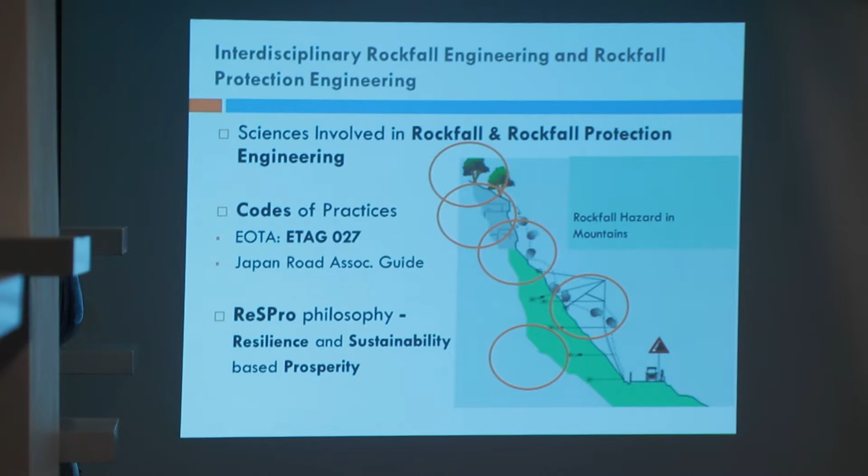And indeed, I again want to highlight that our infrastructure development should be sustainable as well as resilient, so we have to think about the environment as well. If we think about environmental science and environmental engineering in rockfall protection, there comes the role of environmental engineers as well. So what I'm trying to highlight here as the fundamental concept is that rockfall engineering is an interdisciplinary field, and rockfall protection engineering is such a beautiful field of specialization which requires interdisciplinarity.

Now let me penetrate a little bit into the evolution of the Siddhababa DPR. Actually, in 2012, when I was pursuing my PhD, BBC Nepali came to Ehime University and they took our interviews. That was the point when I introduced the possibility of doing rockfall protection in Nepal and at the Siddhababa site.

An engineer who was a friend of mine from Pulchowk Campus happened to design an investigation project, and I was the team leader while back in Japan. I engaged my colleagues in Nepal, and it was done distantly. We prepared a report in 2012, and we tried to find what were the reasons of rockfall, and what could be the possible intervention and protection measures.

And back in 2016, under the leadership of Uttam Pradhan, we happened to design a DPR for rockfall protection along around a 2 kilometer stretch of the Siddhababa Road.

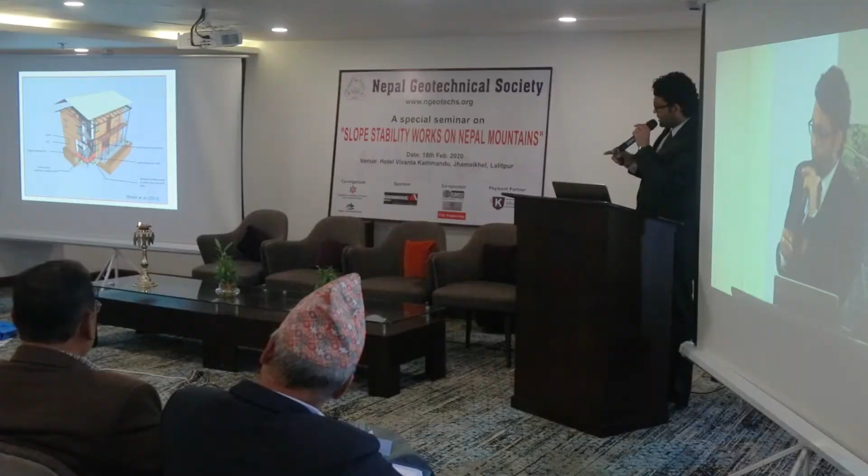This was proposed in 2016 when I came to Nepal from Australia to support post-earthquake reconstruction. As part of my National Reconstruction Movement campaign, I tried to serve as an engineer in different rural districts: Kabre-Palanchok, Sindhupalchok, Gorkha, Sindhuli, many different places. This was our proposal, integrated with interlocking brick, and I was the team leader for getting it approved from the government of Nepal. You can see in Reconstruction Design Catalog Volume 2, my name acknowledged as the team leader.

Interlocking brick was approved, but rubber soil mix is still not too convincing. Now I have moved to Nepal permanently and am trying to carry on that campaign. Based on my conversation with CLPIU friends in the government of Nepal, they are very positive to approve rubber soil mix. Someday we might be seeing a revolution of rubber soil mix, RSM, use in roads, buildings, and other heritage site projects.

This is a self-funded project. I love conducting research and supervising research. In 2013, I supervised one of my researchers using my own fund, and we published journal articles and conference papers as well, and he has just recently finished his PhD and is doing so well. Similarly, now I have another researcher, a graduate of Pulchowk campus, and I have been funding myself, and he has been doing this research, and we have just completed the write-up and sent it for publication.

I hope I don't have to do more when it comes to road. There are so many leaders of road departments and other road-related departments. So I really appeal to you, sir and madam, to facilitate funding for rubber soil mix use in road projects so that we can have our own native solution. So what is that native solution?

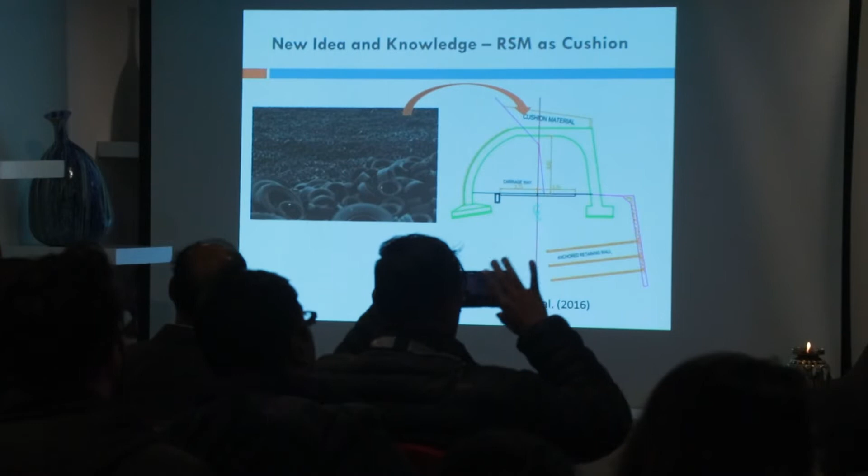See the consequence of using RSM in buildings. Now I have been proposing the use of this rubber soil mix, or scrap tire, in rock sheds as well. What you do here is model it using a 2 degrees of freedom system. My mentor at the University of Melbourne has developed a program to simulate that behavior of the 2 degrees of freedom system. Using that, by characterizing the cushion made of rubber soil, we can actually know how much energy is dissipated on that cushion layer.

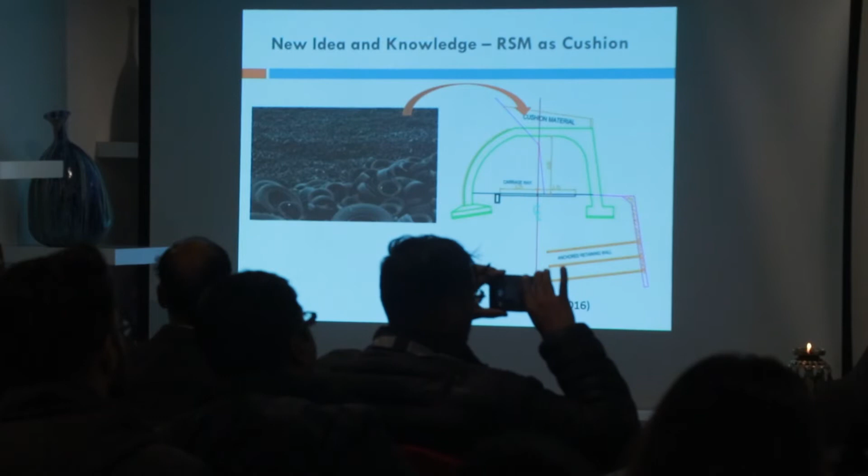Once you know the energy dissipated on that cushion layer, for the remaining energy, you can actually design your concrete rock shed and reduce its size. That means you would have more carriageway width. You can save the cost with the same size. Such a beautiful solution that I really wanted to propose. If you fund this research project, otherwise I'll fund it from my pocket anyway, doesn't matter. We should be able to design rock sheds with rubber soil mix as the cushion layer.

But look, this is how life goes, we have to struggle. Anyway, let's work with NGS to use rubber soil mix in rock sheds and use the hands-on skill of geowork-like companies along with our own native innovation, and go ahead with it. This is what I really wanted to appeal, and thank you for kindly listening to me. Thank you very much.

Siddha Baba site along Siddhartha Highway has seen more than 70 deaths in a 3-kilometer stretch over the past years.

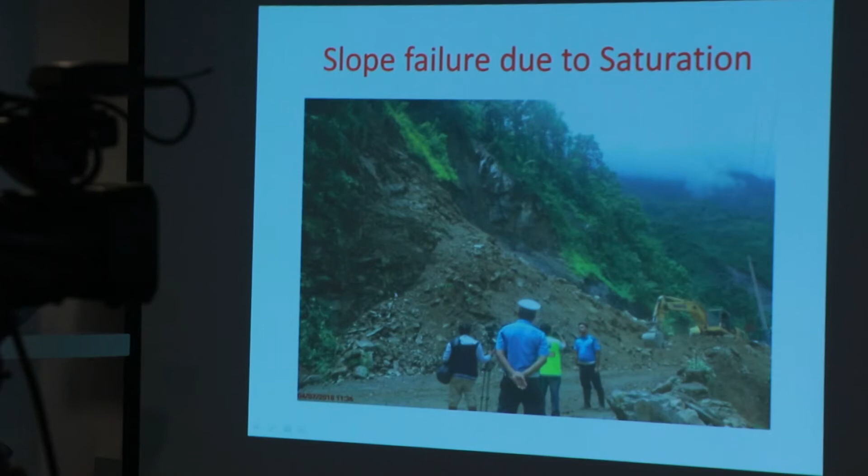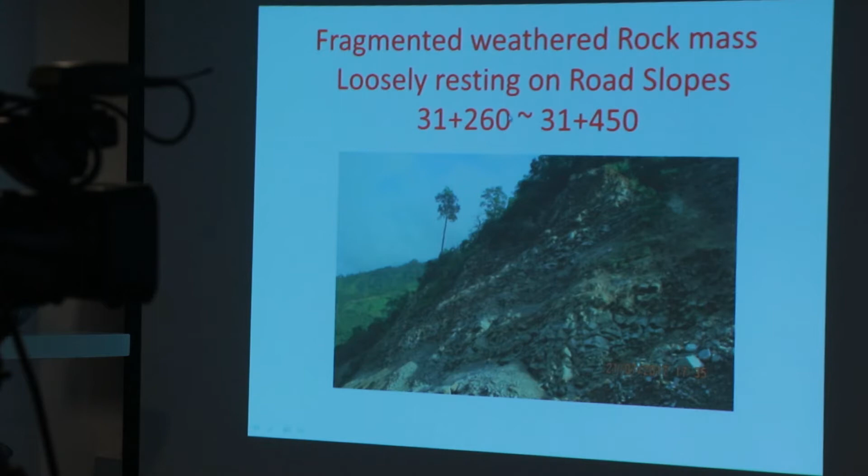Here is a photograph of slope failure on the Narayanghat Mugling Road itself. This is one of the problematic sections, currently controlled by slope trimming and rock netting technique. This is another problem site where the rock mass is sliding from its joints.

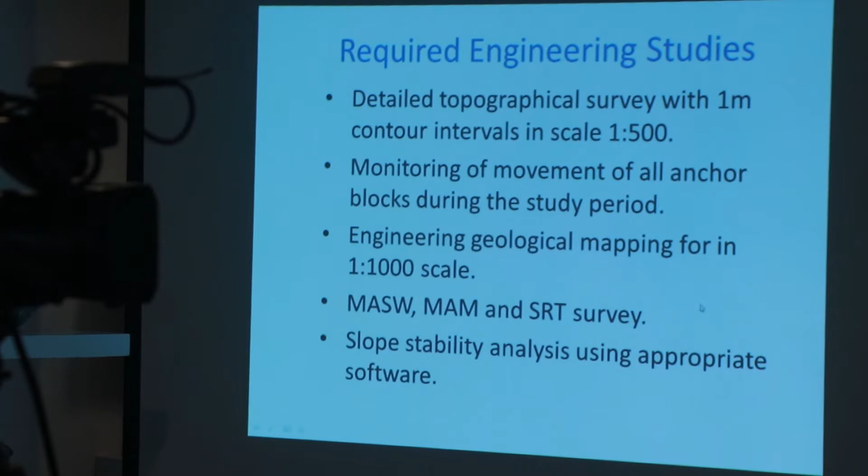For slope stabilization works on such roads, we found the following engineering studies are required: detailed topographical survey with 1 meter contour intervals at a scale of 1:500, monitoring of movement of all anchor blocks during the study period, engineering geological mapping at 1:1000 scale, MASW, MAM and SRT survey works, and slope stability analysis using appropriate software.

The solution and studies include rock bolts, rock nets, toe wall, drainage, soil nailing and bioengineering measures. Usual survey works such as topographic survey, drone survey, and engineering geological mapping will be required at such sites.

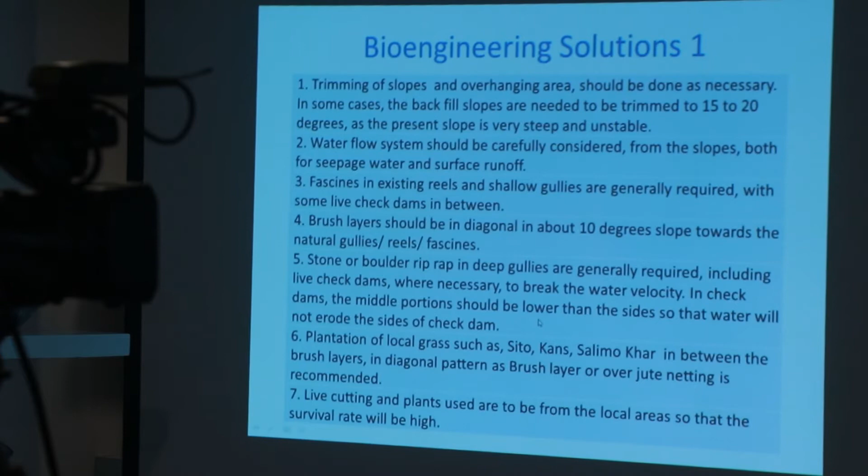So here I am presenting the bioengineering solutions. Many bioengineering techniques are covered here, from 1 to 7. The first is trimming of slopes and overhanging areas as necessary. In some cases, the backfill slopes need to be trimmed at 15 to 20 degrees, since at present the slope is steep and unstable.

Second, the water flow system should be carefully considered from the slopes, both for seepage water and surface runoff. Third, fascines in existing rills and shallow gullies is necessary, with some live check dams in between. Fourth, brush layers should be diagonal at about 10 degrees slope towards the natural gullies, rills and fascines. Fifth, stone or boulder riprap in deep gullies is generally required, including live check dams where necessary to break the water velocity.

In check dams, the middle portion should be lower than the sides so water will not erode the sides of the check dam. Sixth, plantation of local grasses such as sito, kans, salimo, khar, simali khar in between the brush layers in a diagonal pattern as brush layers or over jute netting is recommended. Seventh, live cutting plants used should be from local areas so the survival rate will be high.

Bioengineering solutions: the eighth is jute netting may be required with use of live cutting pegs in steep areas with loose soil materials. Grass seed spreading is recommended in areas over jute netting or open rocky areas.

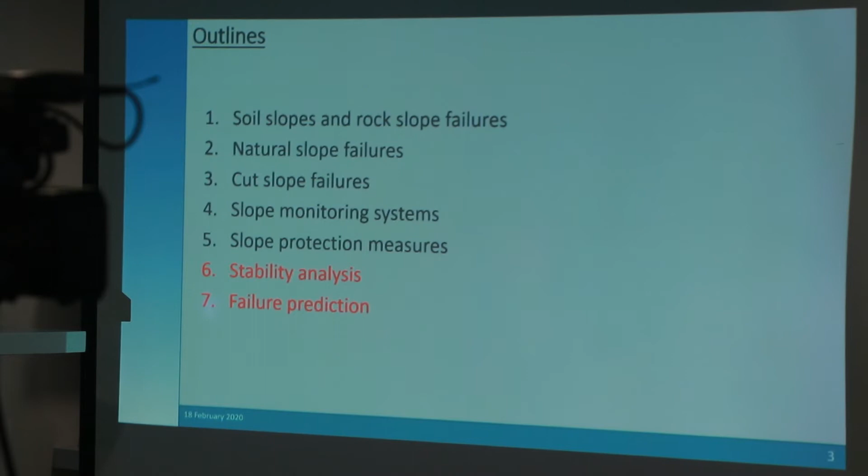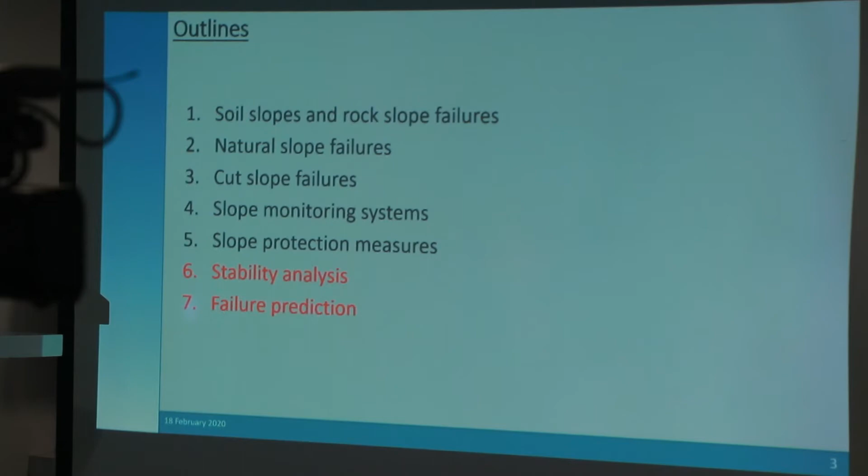For the outline, I try to cover some typical soil slope and rock slope failures in different parts of the world, natural slope and cut slope - same thing - and a slope monitoring system, not typical modern but contemporary after 2000. Some slope protection measures in general, and I tried to cover a little on stability analysis and failure prediction. These are, I think, the new things. Our MSc students might work on this.

Natural rock slope hazards, as my previous presenter already presented, are encountered in roads, reservoirs for dams, and river valleys. Similarly, cut slope or built-up slope hazards we encounter in open pit mine slopes. That doesn't exist in Nepal yet, but maybe in the recent future, after 10 or 15 years, it will come.

Another one is slope failure during deep dam foundation excavations. We are designing several mega-size hydropower projects with 100 to 200 meter high dams, and sometimes the depth of bedrock is 100 meters below the riverbed. In that condition, we have to excavate all the way down to 100 meters, so we'll have rock slope stability problems there.

The next one is for surface powerhouse excavation - we already faced it in several projects, and more are coming. Next, we don't have an issue with embankment dams because we only have one in Nepal, Kulekhani, which is a 112 meter high rockfill dam, and it has not failed. So we haven't faced that, but it may come in the future.

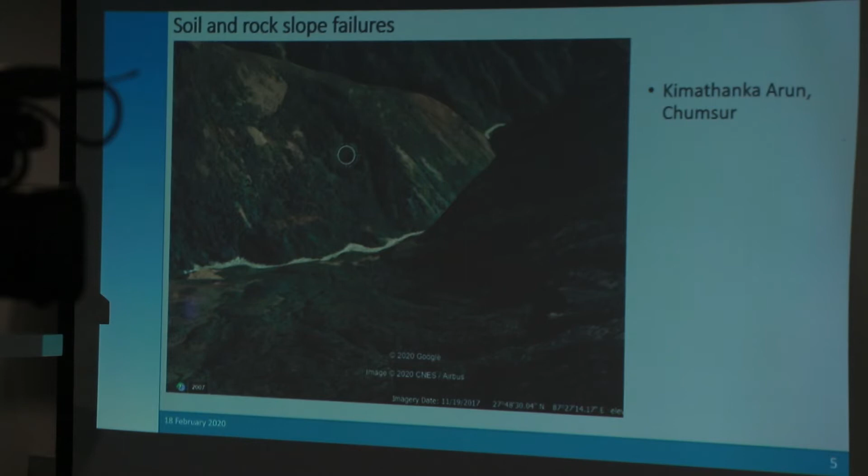The failure started at 3200 meter elevation, and it happened in June, that means before the rainfall. So I think it started with the melting of the snow, because the snow line at that place is around 2700 meters, so it started up to 500 meters above that.

When the snow started to melt, it disintegrated some part of the rock, and it started at the top, and when it moved down, it brought all the material on top of the rock.

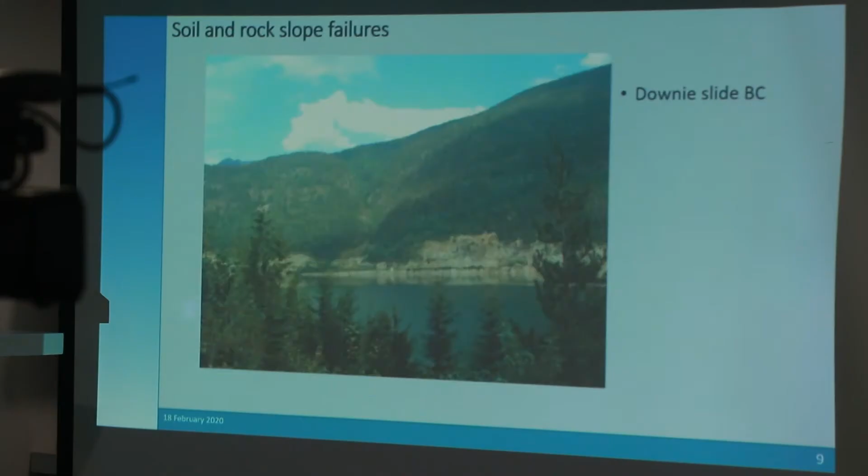And we are building some of these dams, so I think these examples are suitable for us.

Another one - these are natural slopes, and this one I don't have the picture for because this picture was taken in 1978. It's also for the same dam, Revelstoke Dam. When they were excavating a 14 meter diameter diversion tunnel, there was a failure just upstream of the diversion tunnel. You can see the heave of around 14 million cubic meters of rock, all at once, and there were very few fatalities.

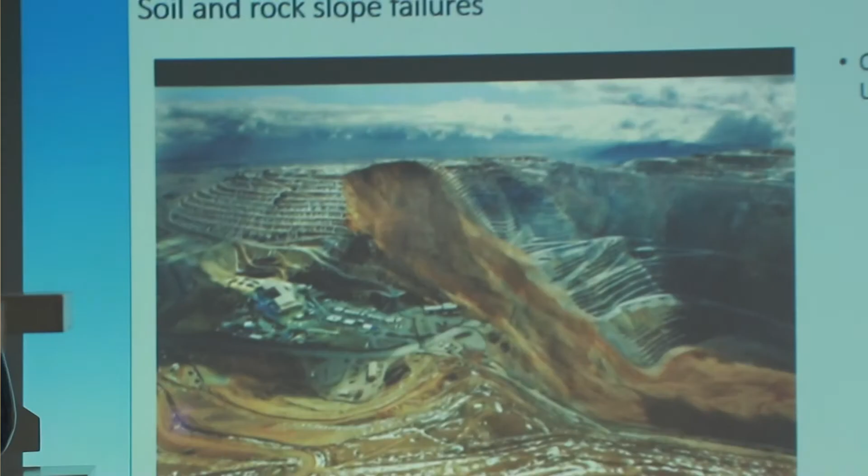The operation of open pit mines is really complex because people are working there. You have to protect the people, you have to evacuate them, and you also have to know when the slope is moving, so when it will fail. That has to be monitored. This one is one of the mines in the US, and the other one is the copper mine in South Africa. We don't have that big a mine yet, but hopefully if we get some more metals, then we can have mines.

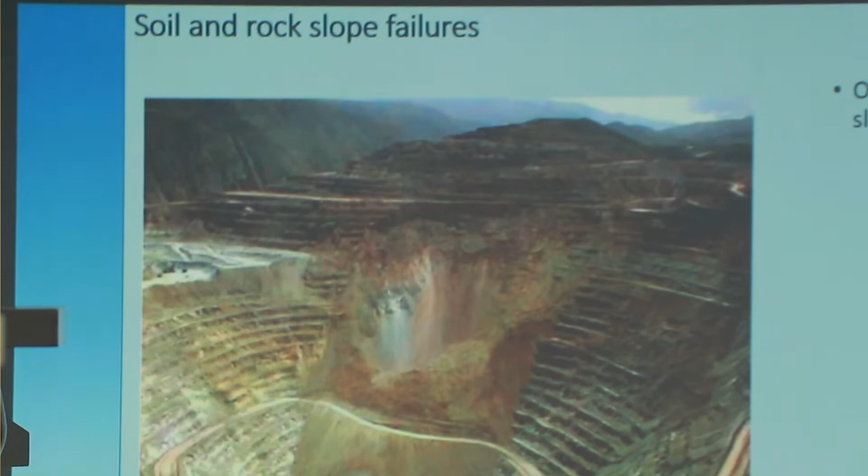Sorry, I think it's 2002. This one is 2002, I don't know the date of the previous one. Yes, in 2002, sorry.

So I jumped to slope monitoring. As already said, I just collected things together.

The instrumentation we use in monitoring slopes includes inclinometers to measure deflection, and one new thing, shape accelerometers, which I used. It's a three-dimensional array, coming in a 30 centimeter long sensor, and it can measure three-dimensional deformations in X, Y, Z. But it's complex. If the slope is moving really slowly, it's very difficult to determine which direction it's going. But if it's moving in a single direction, it's very particular, and it's real-time monitoring.

That means you'll get the data in real time. Like with the inclinometer, you go and put the instrument, and if you measure today and then tomorrow, you'll get two data points. But with the shape accelerometer, you can get data every 10 minutes, every 5 minutes. You can customize the data.

Next one is piezometers, which I think we are all familiar with. I have a detailed photograph as well.

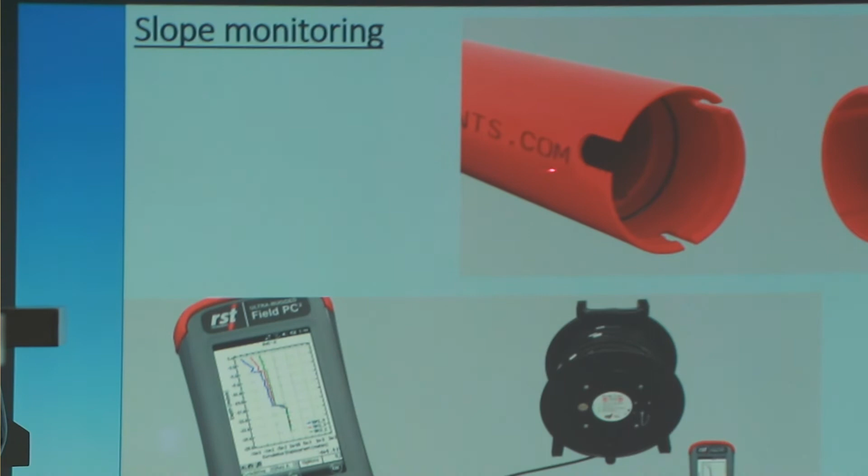Here is the shell of the inclinometer. We put it in from the ground. We insert these measuring instruments, and then we get the position of the inclinometer at that particular time.

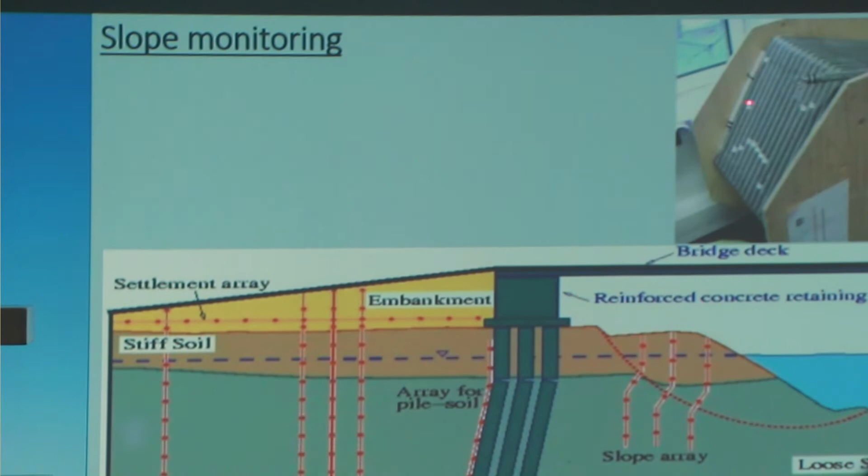For the shape accelerometer arrays, these are the arrays. They come in 7 meter, 9 meter, and even longer if we want, but they are pretty expensive for us, about $150 per foot. So pretty expensive, but how can we use it?

It's on a slide. We can put these arrays vertically, and if it's moving in this direction, you'll get real-time data. Also here it's showing the concrete pouring of the bridge, and it can be placed together, just in the tunnel like an extensometer around the tunnel.

It continuously emits laser to the slope, and when it returns back, it records the difference in time. So let's say if the slope moved 5 centimeters, there should be less time for the laser to travel from the source to the slope. That's how it works.

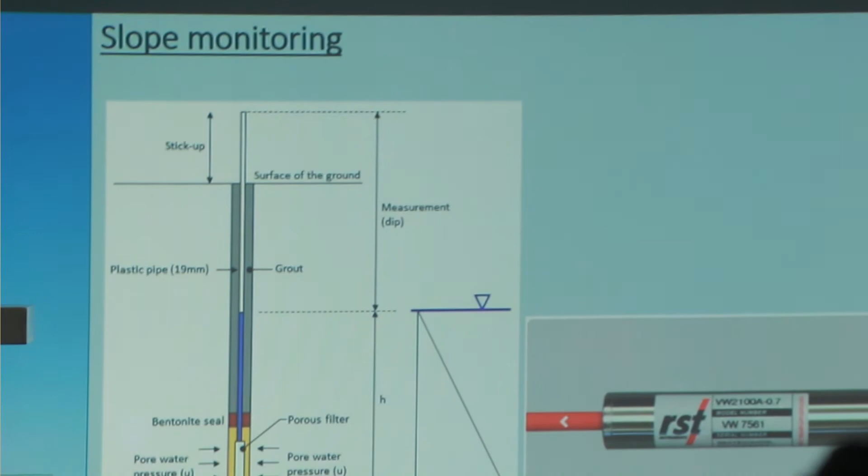The most effective thing in pore pressure measurement is, let's say in a soil slope, when we already know the shear plane. Then what we can notice in the pore pressure is if there is shearing or acceleration in the movement, we can feel the acceleration in the pore pressure generation. That's how we get the information from the piezometers.

Okay, so not in detail, but I just summarized some of the slope protection measures. I haven't gone to the stability analysis yet because that's a really big thing and it takes time.

So what I suppose, the slope protection measures are based on the following factors. The first thing, we can achieve slope stability from the reduction of pore pressure, in most cases, if the slope is not drained and is full of water. The next is the reduction of the slope itself, meaning change in the slope geometry. And the third one is we can protect the slope bottom from erosion, slope surface from erosion.

That's how we do it, I think, in bioengineering. And protection from toe cutting, where we put the toe wall. That's why if there is support at the toe, then it will not move at the top.

And the next one is slope reinforcement. What I mean by this is either bioengineering reinforcement or short bolts that we don't anchor, we just put there, like rock bolting in a tunnel.

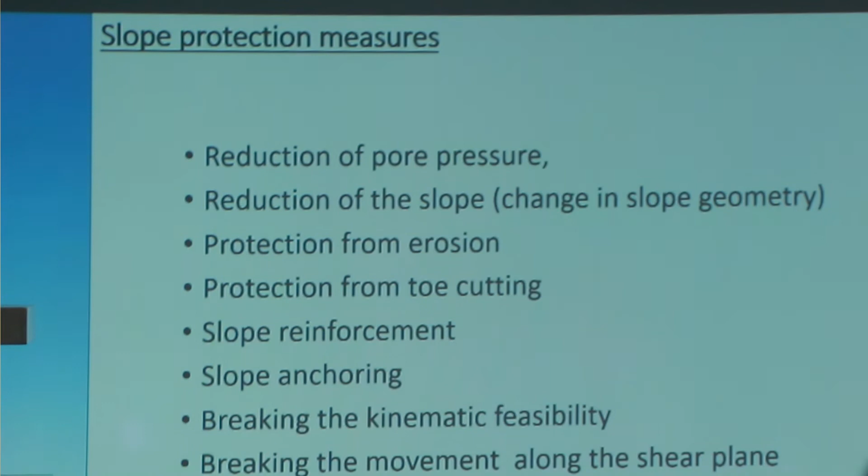And next is slope anchoring. Like if we have a big block, we cannot just put a bolt. In that case, we have to tie that big block to a stable rock surface.

That's slope anchoring. Another one works with slope anchoring, but we break the kinematic feasibility of the whole rock structure, like the joint and foliation plane structure. We add something and then we break the feasibility.

And another is breaking the movement along the shear plane, where we can introduce, let's say, toe support, or even increase the load at the toe. There are different things, so I have some examples.

This is again the example of the Dutchman Ridge, just upstream of the Mica Dam which I described earlier. This one includes almost a 9-kilometer long drainage gallery system at different directions. They measured the pore pressure before and after introduction of the drainage gallery. This pore pressure reduction will certainly increase the friction parameter, I suppose, and that will help reduce the rate of slope movement.

Next, I'll come back to the slope of the upper Sanjen powerhouse. There, we tried to change the geometry by removing the top unconsolidated soil mass. At the beginning we tried with a bottom toe wall, but in the end, when we excavated from top to bottom and used surface reinforcement, it worked, and there was no need for the bottom toe support.

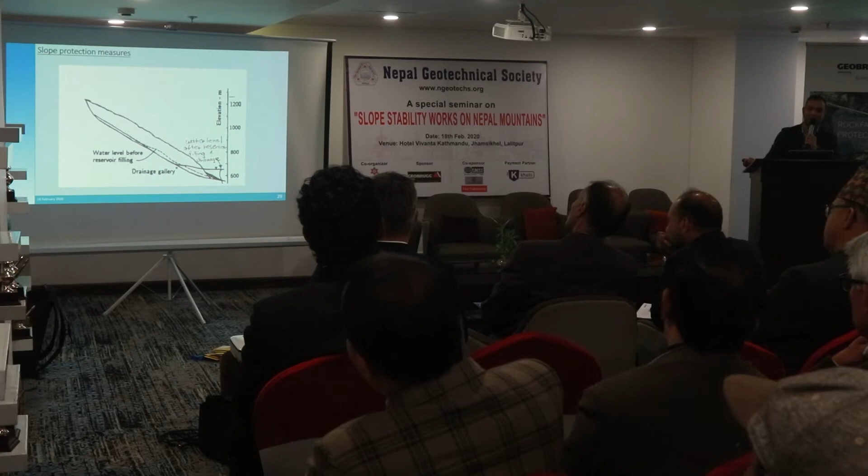So I will come to this one. This has one particular thing - again the slope of the Dutchman Ridge. There was a big question: why is it moving 6 to 7 millimeters per year but didn't fail? Most people's analysis was because of this toe weight.

So if we remove this toe weight and just analyze the slope, we get a factor of safety less than 1. So in road excavation, river valley construction, and dam excavation, this has a big meaning in the consequence. What is the consequence? We don't care - we just cut at the bottom and look at the upper slope.

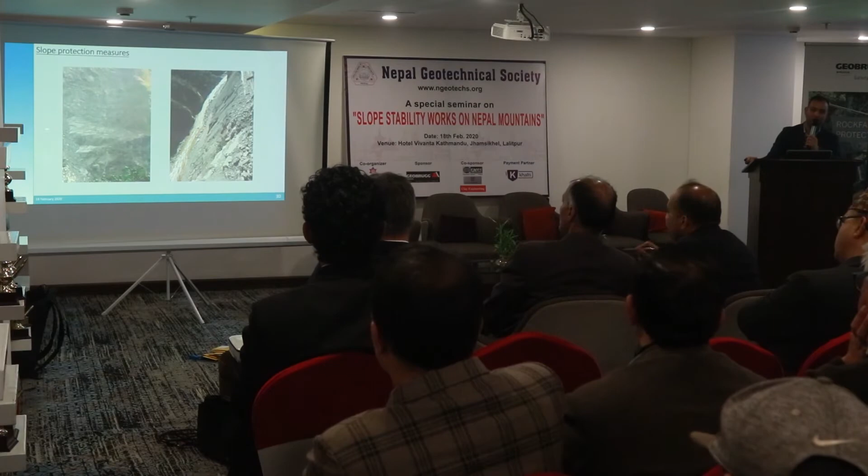And next is the toe at the corner of the upper Arun project, where the Arun River bends. You can see this one - it's not the foliation but one joint, and it provides the kinematic feasibility of the whole upper part of the failure. So the bottom part started not with this, just with tension failure. At the bottom the rock failed in tension, and when it reached this joint, it couldn't support the upper part, and it just moved at one point.

And the next one I will come to. This figure you can guess - the Bagmati River is cutting the toe of the whole slope, and this threatens the upper slope of the recently cut sections. I don't have any details on this one.

Okay, so I'll come very briefly to stability analysis, because I think it's a really big and important topic that I could not cover just now. For the slope stability analysis, what I propose is that in the slope stability methods, the important factors are first the formulation of the failure mechanism.

And what we do next is we use the commercial software - the same commercial software for the soil slope and for the rock slope. For the case I just showed in the road section, it has rock outcrop every 10 meters, and in the middle there is a colluvium. So where is the failure plane? We put uniform homogeneous material all the way down and use the software. So you can judge it - you are our geotechnical engineers.

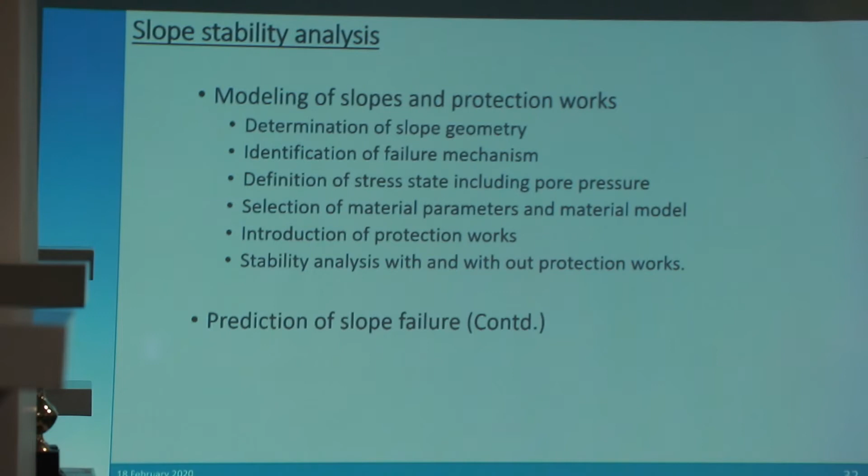And next, as I already said, the prediction of slope failure. There's lots of work done actually in the open pit mine field. Some people - there are lots of papers you'll find on how to predict the failure date. So if you can predict, okay, this slope will fail on March 3rd, then you will get lots of money. Who will try it? Who wants to try it? I think our new engineers. Thank you.

May our fragile slopes be well equipped with inclinometers and piezometers. May no Jure landslide repeat again. And may your work turn out to be a milestone for the coming future.

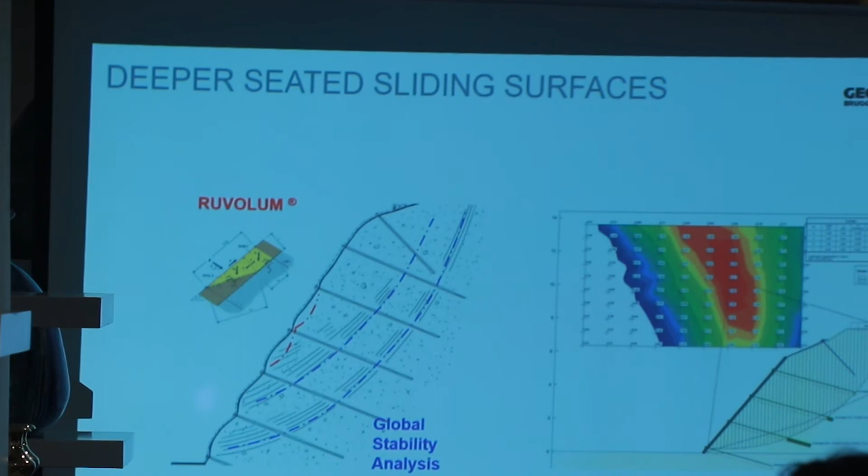So for deeper seated sliding surfaces, first we would do a global stability analysis and then investigate what happens between the nails. And for superficial instabilities, we would go with an analysis of the slope with this RUVOLUM software. This is just a...

Different force transmission. This is an issue I face very often, that there is, even in the geotechnical society, not of Nepal I would say, but in general, globally, there is sometimes a little bit of confusion about what we are talking about.

On the left-hand side here you can see this is an anchor, which is a real anchor. It's a pre-stressed anchor. That means we only mortar the bottom of the anchor, of the rebar, of the strands. And this, of course, then has to lie behind the sliding surface, which you can see here. Also, then we have the free anchor length, and you can see here also that there is a very high load of force at the head of the anchor then.

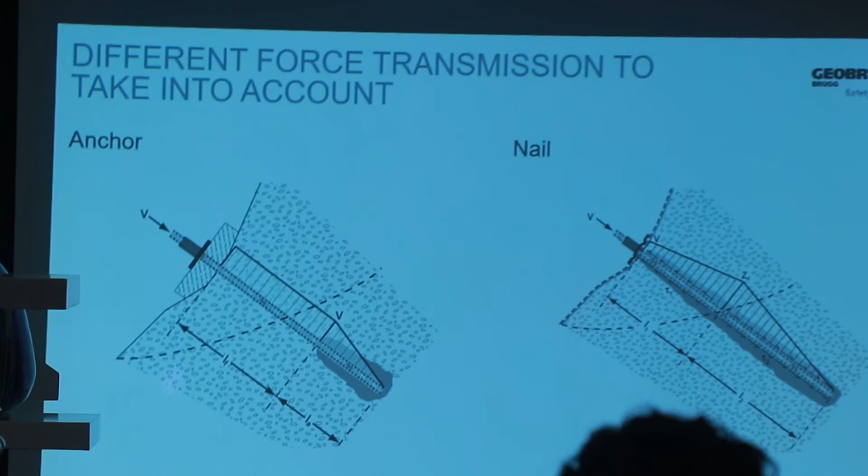That's why, for example, we do those pillows at the head of the nail. Whereas in most applications, when it's about the slope protection systems I'm talking about, we will use nails which are fully grouted and will transmit the force, the load, through skin friction. And here, the load at the head of the nail is smaller than in an anchor case.

So this is something I find very often, a little bit of confusion. Are we talking about anchors? Are we talking about nailing? Then if we talk about the foundation of rockfall barriers, yeah, we anchor them, but in fact they are micropiles. So this is something to keep in mind, I think.

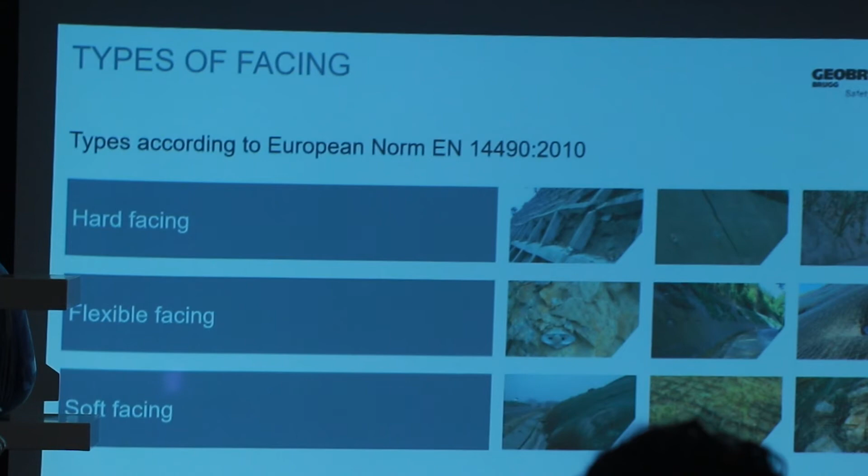So when we talk about the facings, we can diversify into basically three different kinds of facings. We have hard facings, mainly dealing with any kind of concrete structure. We have soft facings, which are generally, for example, geosynthetics. And we have flexible facings, which are all sorts of different kinds of meshes.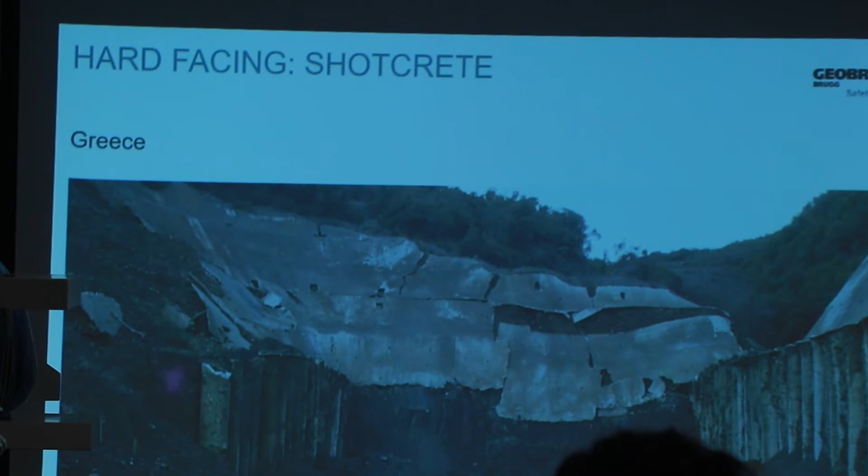So with the hard facings, shotcrete is one of the most widely applied methods all over the world. The problem with shotcrete, from my perspective, is very often that we cannot see or control what the water is doing behind the facing. And even if we put drainage pipes according to the design, have you ever tried to do maintenance on those drainages after 5, 6, or 10 years? Depending on the fine-grained material behind the facing, this is a difficult issue. Here you can see a typical shotcrete failure.

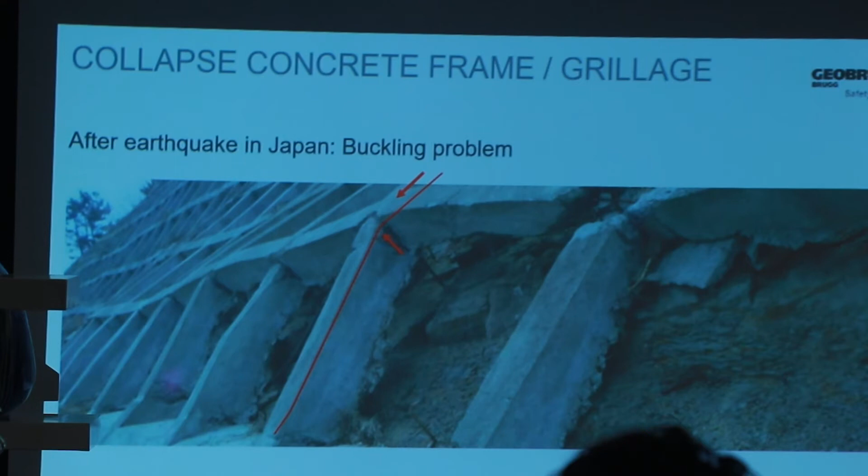Other hard facings, for example, are those concrete grid beam solutions, widely used in Japan. You can find them in Taiwan, or in other countries all over Asia and also South America. The problem I see with them is that they are extremely time consuming. To build all those formworks and then reinforce them properly is extremely time consuming and costly. Another disadvantage is that it's a brittle structure, and especially in earthquake-prone areas, they are very vulnerable.

Soft facings, geosynthetics in general, are very good for erosion control, but for slope stabilization, rather not. Then when we come to flexible facings, there are a couple of older systems, and the pictures you can see here are from a system introduced by Geobrugg in the 80s, which uses mainly wire ropes.

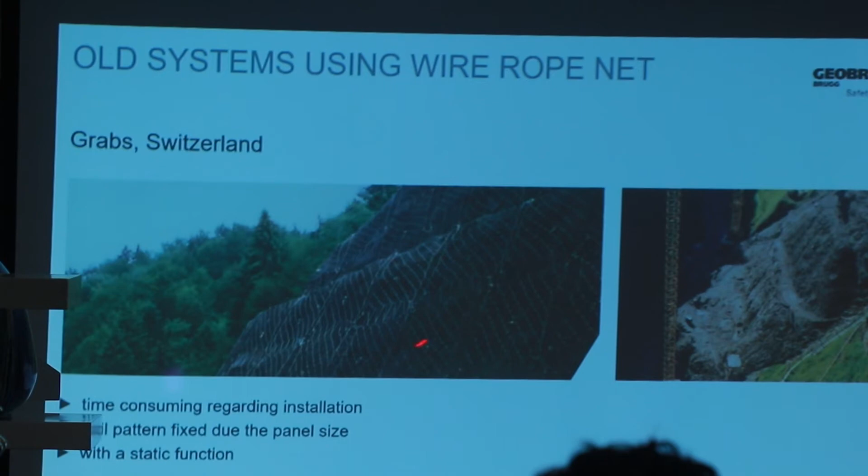The main problem with the wire ropes is that it's very time consuming to install, and you are pretty much bound to where you put your anchors, because the nail pattern has to conform to the mesh panel size you use. From a geotechnical perspective this is a big disadvantage, because I want to put the nail where I think it's necessary, for example at intersections or under overhangs.

So when we talk about high tensile steel wire meshes made by Geobrugg, this is a mesh family we call TECCO. It basically consists of 3 components: these steel wire meshes with different openings and different diameters of the single wire—you can find samples on the table on the left-hand side when you leave the room; there are different kinds of bearing or spike plates, as we call them, which sit on top of the nail; and there are connection clips, also made from high tensile steel wire, to connect the mesh panels.

Like that, we are able to create a homogeneous area of material with the same strength, and we can place the nails according to our geotechnical requirements everywhere in the area. Additionally, of course, we need nails. Here we have the usual rebars—let's call it rebar, it's effectively a rebar. But especially in soil conditions, self-drilling nails or so-called hollow bars are recommended, because it makes it much easier to drill and grout the hole at the same time, rather than fighting with collapsing holes before you can insert the rebar or the grout pump.

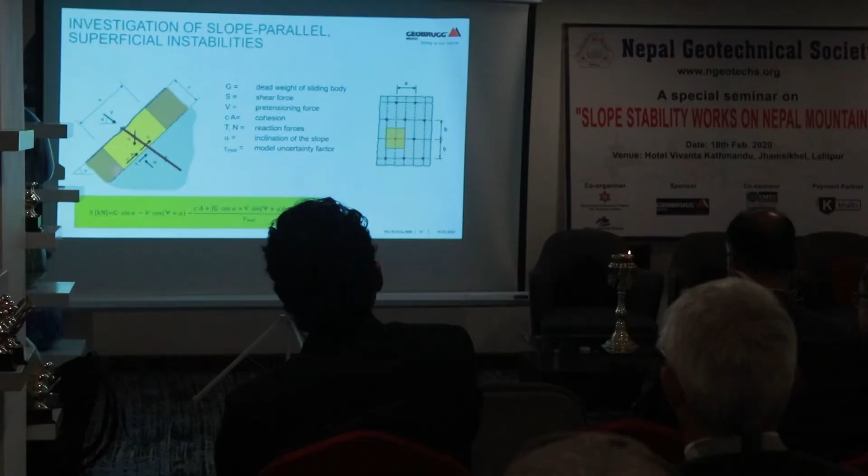The second investigation relates to the slope parallel superficial instability. I think we already see that the decisive point, if the unstable layer is getting big enough, will only be here the shearing of the nail, also the diameter of the nail.

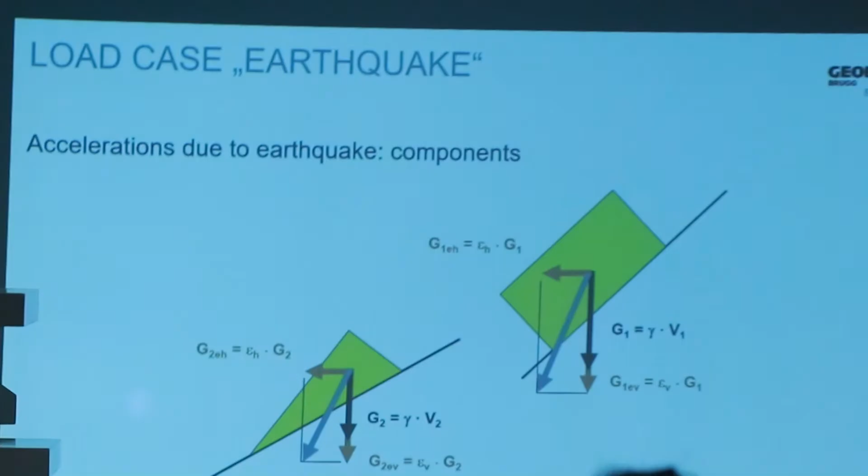Also, in that dimensioning concept and in the software, you can introduce a load case of earthquake simply by increasing the weight of this dead body with the acceleration factors of the earthquake or of the assumed earthquake. The same, of course, can be done with streaming pressure with water influence in the slope.

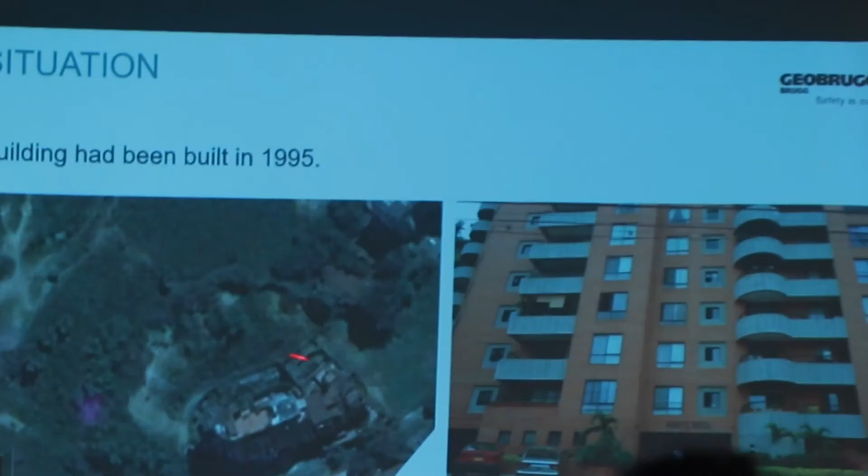I have a quick case study of a project in Colombia in a place called Cali. We can see here a residential building built in 1995. You can see the slope here behind. And very soon after the people moved in, they started to have issues with that slope.

So that was in 2007. Then in 2008, the retaining wall in the backyard gave way. And in 2009, one of the remaining residents, because a lot of people moved out already, took this video from his balcony of the ongoing collapse of the slope behind them.

And it was only after that event that the client and the consultant approached us to develop a proper solution. So this is again a very nice example of geotechnical know-how, or geotechnical engineers very often only get involved into the project when a failure already happened.

It's not very often that they have a video of the failure of the slope, which we can treat afterwards. We have been doing trimming of the slope first, then also here they drill with the use of scaffoldings.

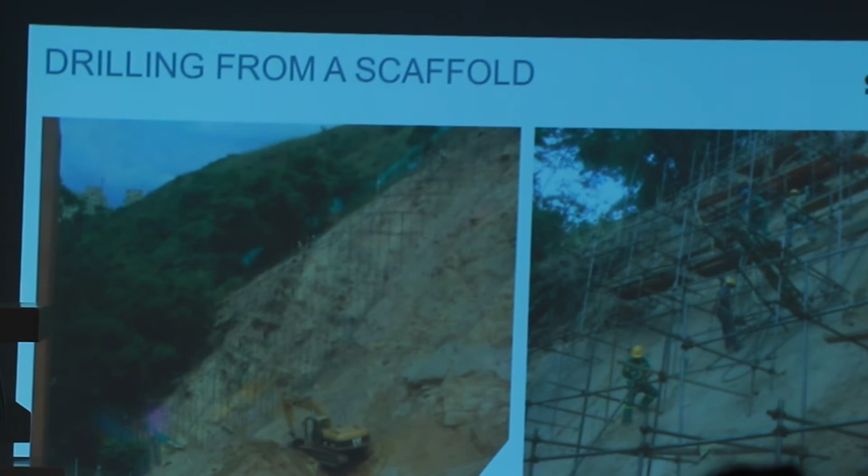At the instruction on the site, this was the first project ever in Colombia, so we had to send people to instruct the contractor how to do it properly. And this is then how it looked in 2011. People moved back in, all fine so far.

All those projects, especially in areas where there's a lot of rain, we will recommend or advise to use hydroseeding afterwards, so we have a quick revegetation of the slope, which on the one hand will make it look nicer. On the other hand, it will enable us to have a certain control of the surface water also. And of course, the small roots will also contribute to the stabilization of the first 10-15 centimeters of the slope.

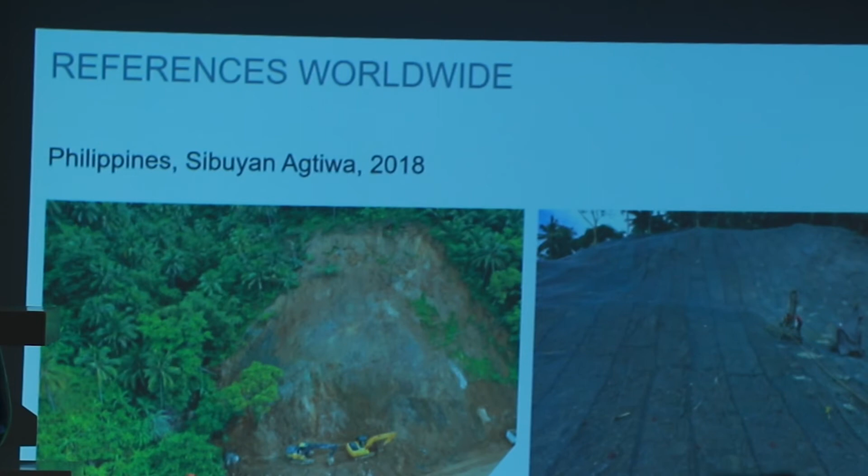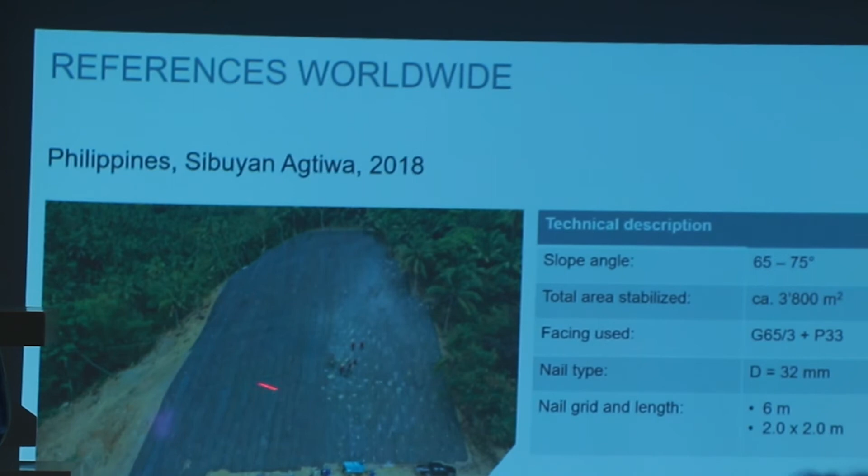Another project here during excavation. Not always are the conditions like that it's so easy actually to install it. You can also see that the drilling machines used here are lightweight drilling rigs, which are very easy to move over the slope, so this will also save time during installation.

One more project from the Philippines. Since the Philippines is within my responsibilities, a lot of pictures are from the Philippines, I'm sorry.

We have this big project we have been doing in Mindanao in the Philippines, with superficial erosion of these very weathered andesite materials. This is the very same site just after completion.

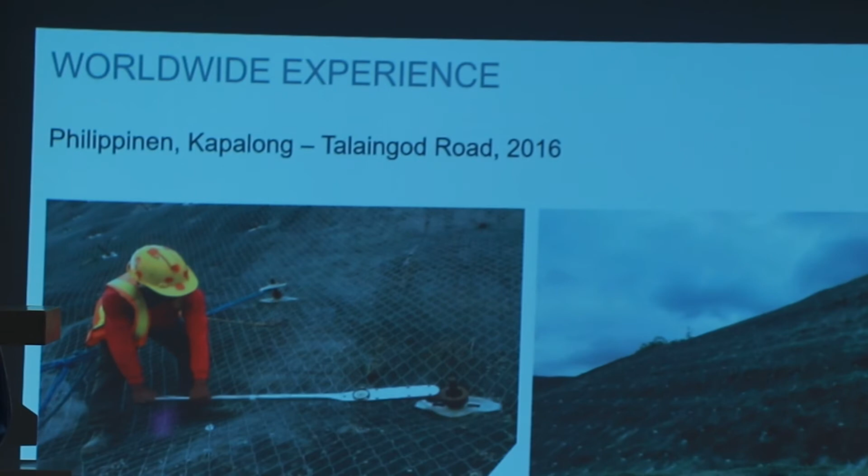Then I can also show you some pictures of a project in Vietnam. This is a relatively small site, with a height of maybe 15 to 18 meters only, in a rock environment. We have this rather high slope where there was initially a shotcrete installation, which you can still see here at the side, which failed. We then covered the whole slope, including the shotcrete, with one of the high tensile steel wire meshes. This is just another perspective.

Small project which we have been executing in Indonesia, almost 90° steep, in a very different geology. This is a volcanic deposit called lahar, which especially in connection with water can be very unstable.

And a couple of examples which had been executed just here in the neighboring India, one on the Kiratpur-Ner Chowk Expressway. Also those pictures derived from the same project.

And one project which is still ongoing on the Mumbai-Pune Expressway, where they use not only small mobile drilling rigs, but also drill from those platforms which are hanging on the cranes.

So I come to the end of this presentation, and then I have a short video as a summary. This is the online software which you can see here.

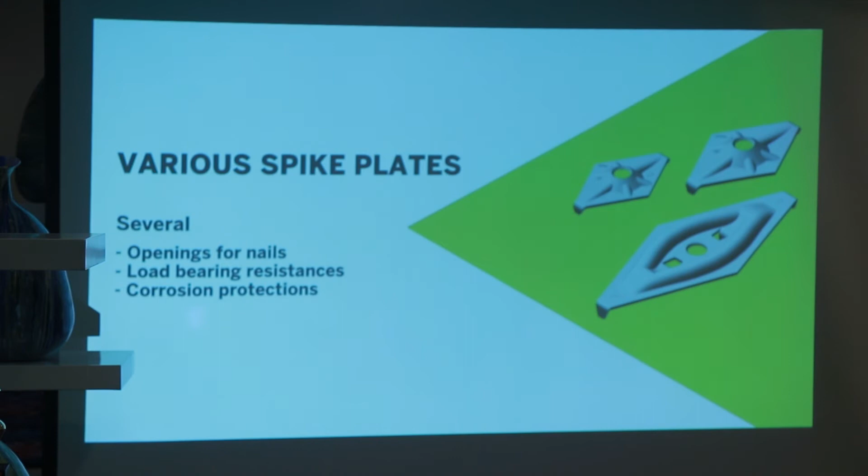This is one project in an abandoned mine in Brazil. That one is in Germany. Here you can also see the effect of hydroseeding. Thank you very much.

So in the second part, I hope you are still not too sleepy, it's almost 6 o'clock. We will deal with rockfall barriers and debris flow barriers.

So Shankar already mentioned or introduced rockfall barriers. This picture here is in Nepal. This is the first Geobrugg rockfall barrier project which we have been doing in Trisuli.

In this first part, we will shortly talk about the rockfall phenomenon. I will give a brief introduction about how rockfall barriers look like. I will show you a case study and a couple of examples, and then we will do exactly the same for debris flow barriers.

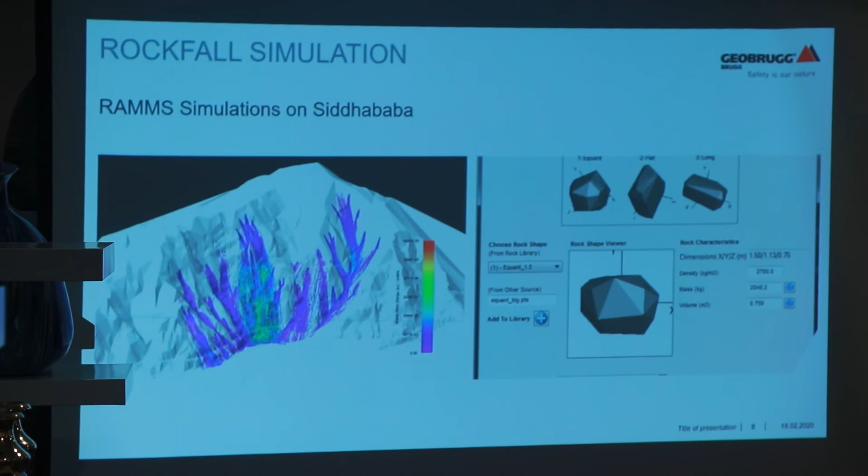Rockfall simulations provide data such as energy at all points of the trajectory, so we can sometimes decide it doesn't make sense to put a rockfall barrier here. We have an easily accessible area here, and rocks from this cliff won't reach the lower ground.

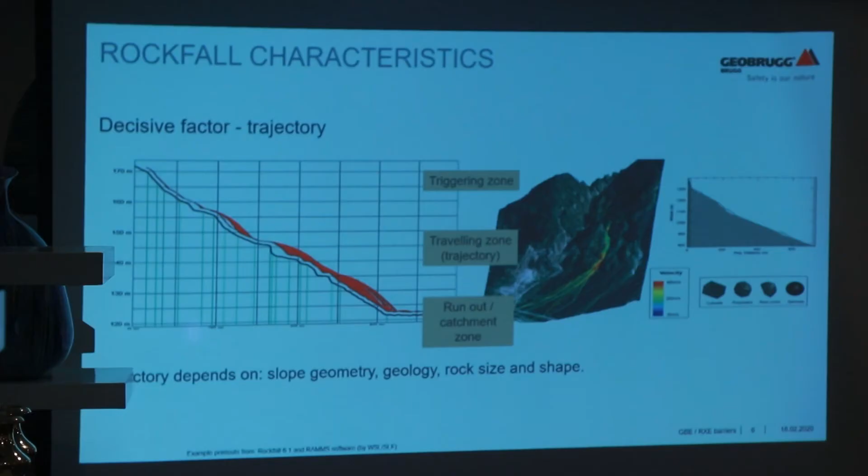We also receive data on the bouncing height of the rocks, which is very decisive, because if we install a rockfall barrier that's 3 meters high and the bouncing height is 5 to 6 meters, it doesn't help a lot, except that we waste a lot of money there.

All this data can also be used to do rockfall risk assessment and risk management. Here I want to draw your attention to charts like this. The chart on the right-hand side is from the Austrian Service for Torrent and Avalanche Control. It's an Excel sheet that provides a very effective, basic means to define different zones of risk, which might help the client decide where the most prone area is that they have to budget money for first.

We don't have money to do everything, but with the help of risk assessment and risk management, we can tell them these are the most prone areas—you need to budget money here first. In this area, yes, there is a certain risk, but not as much compared to other sections, so you can allocate money maybe in 3 years.

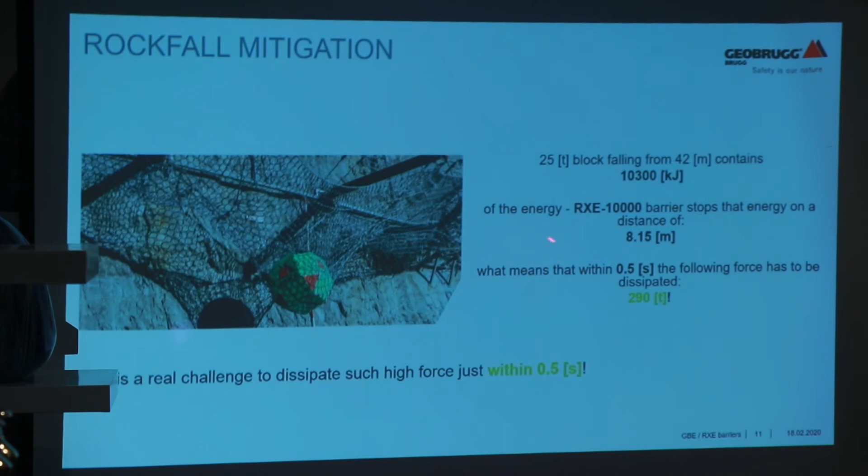This energy, the deflection which we've been talking about, which Shankar also mentioned, will be 8 meters for this barrier. It also means that within 0.5 seconds, the mesh or barrier has to dissipate a force of 290 tons. This is why high tensile steel wire meshes are important.

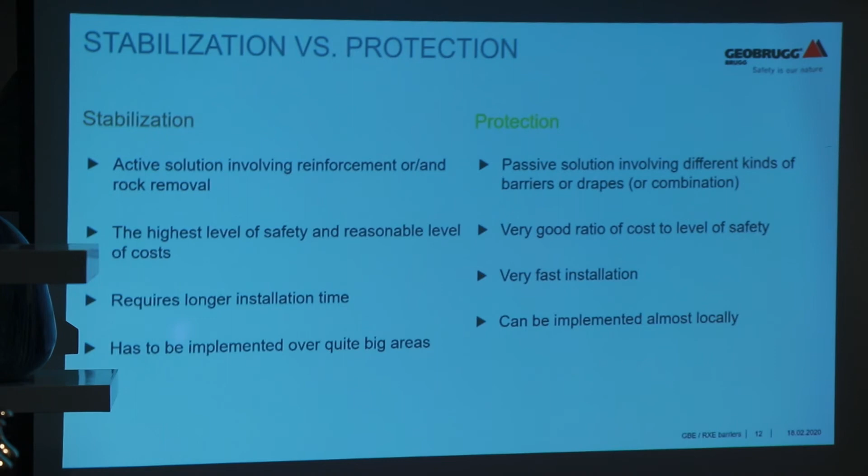Short resume: stabilization versus protection. On one hand is what we call active protection with soil nailing plus meshes. No maintenance is required afterwards, but keep in mind it takes longer for installation time, and if you have huge areas, it's not economical anymore.

Then you could move to protection through rockfall barriers, because there you only have to install a single line, which is done quickly and can cover a bigger area.

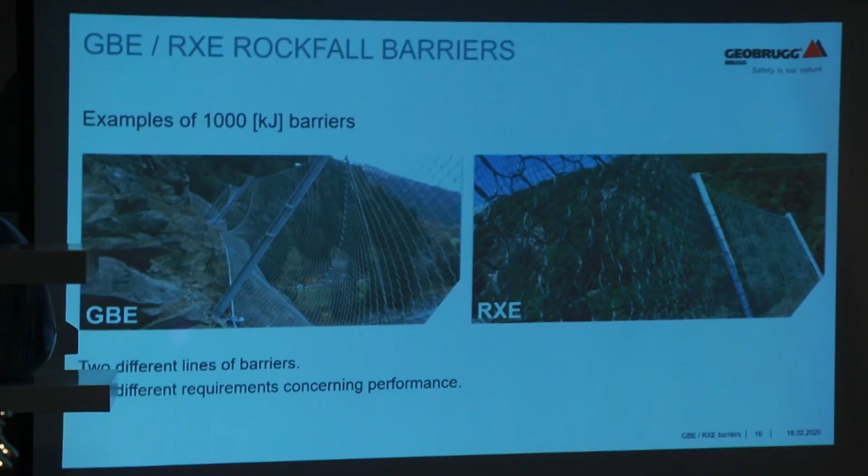But those barriers, those canopies as we call them—it's like a rock shed actually—only work up to a certain energy. Well above 2000 kilojoules, we haven't been able to do it until now, but for lower energies, they work very well. Of course, you cannot have any infrastructure below the road you want to protect, for example.

What might also be very important for the client or for a tender is that those barriers are specified according to certain guidelines. There's a couple of guidelines—one is a Swiss guideline, there's a European guideline, and an Austrian guideline. They differ in certain details, but in general they define a quite good quality level for barriers.

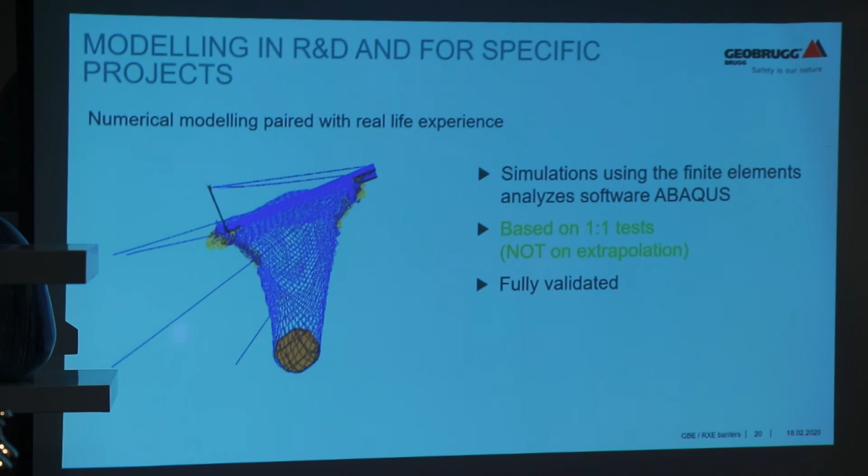Mostly we use ABAQUS, for example, one of the others you might know, to actually see where the highest loads are in the mesh components or in the components of the barriers, which you can see here in the yellow or orange colors.

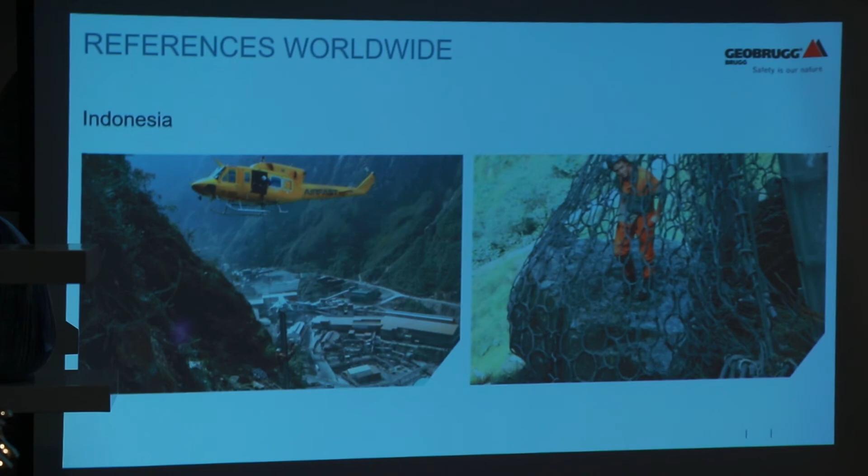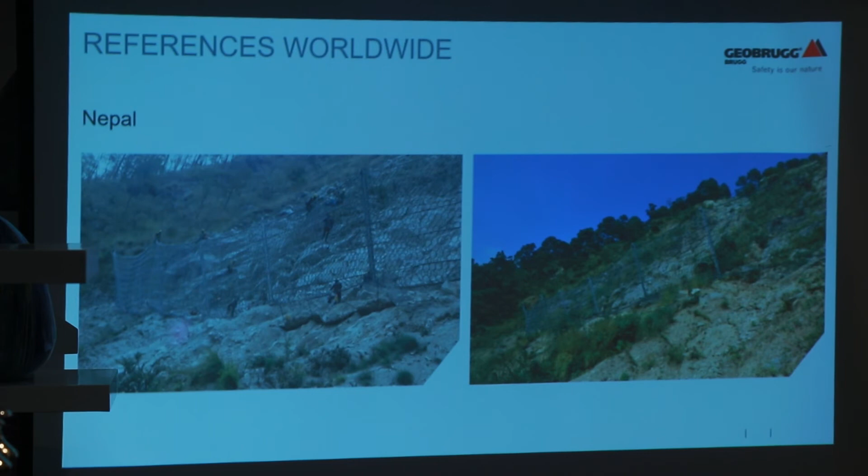You can see here one of the boulders which has been retained in this barrier. Other projects from Hong Kong, where we have been installing barriers for more than 30 years now.

Again, this picture is from Nepal - this was done to protect the Trisuli 3A project. It's also in the upper part, but I didn't have any nice pictures. At the very top of the slope, we also installed TECCO meshes, but I lack good pictures - it's not easy to get there. I don't mind the 5-hour drive, it's the hike up to the top.

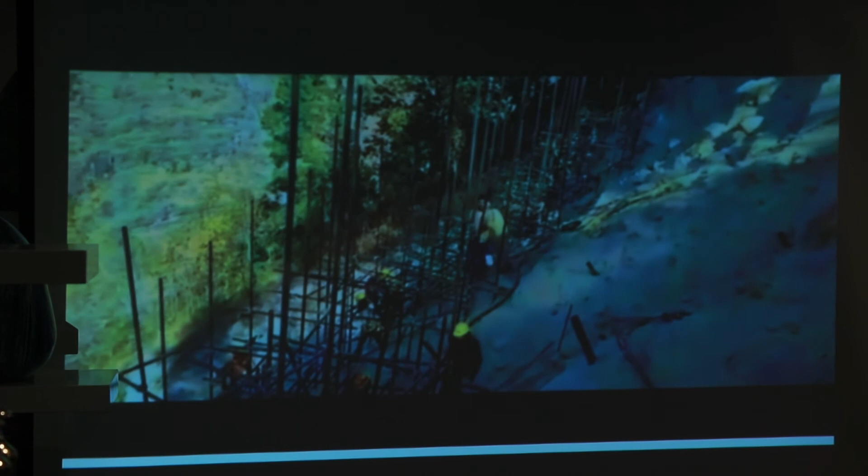So, to conclude this part - I haven't made this video and haven't asked for permission, but this is a short video I was sent from Nepal on that Trisuli 3A project. I hope there will be nobody coming after me.

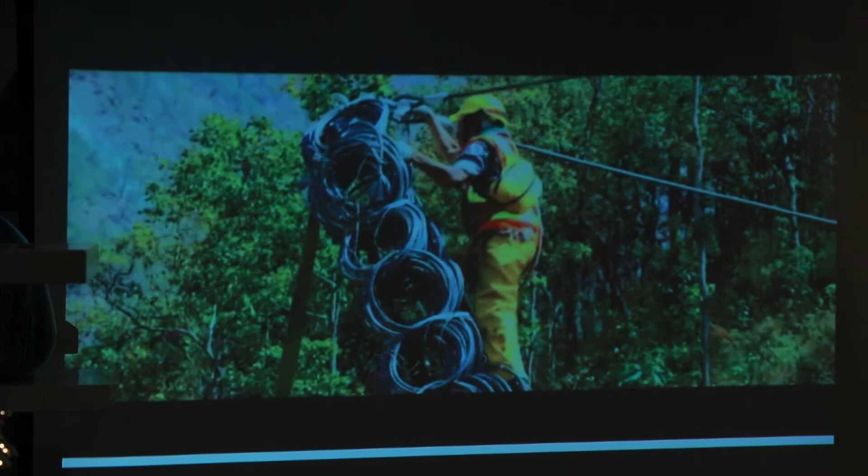They built a small ropeway also to get materials more easily to the top, and we installed the barrier with the help of a helicopter because it's not that easy to access the site. This is the upper part of the slope with the TECCO mesh installation, and this is definitely a site where they have active rockfall.

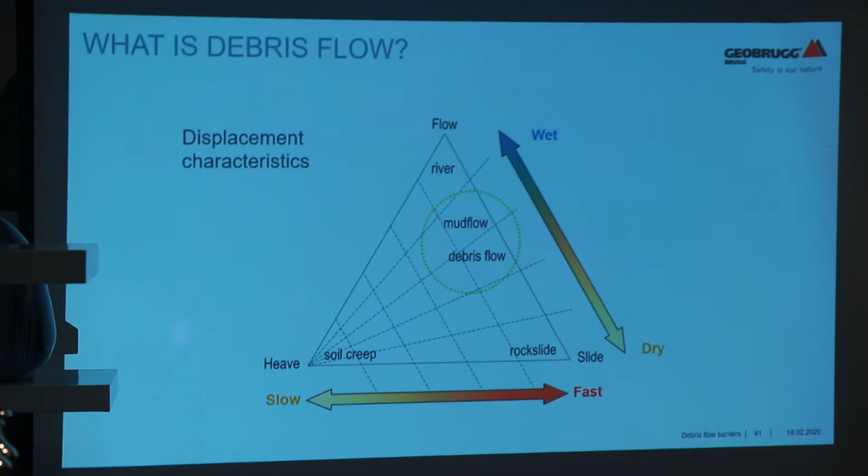Again, you might remember this graph - so now we are not on the rockfall side, but getting to debris mixed with water. We have also been developing dimensioning software here. The difficult thing is that you can either have mud flow, like debris flows, or on the other hand very granular flows. This was quite a challenge to find the valid design parameters to create the software.

Also in Switzerland, we suffer a lot from debris flows. We have a lot of loose material in the Alpine mountains, lots of gravel. We have no monsoon rains, but we have a lot of strong rains too, which will finally result in debris flows. And of course, the destructive energy of those debris flows is amazing.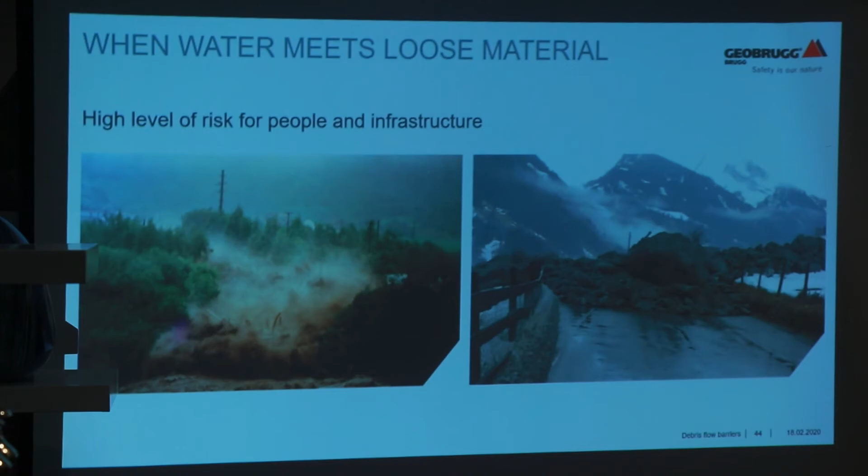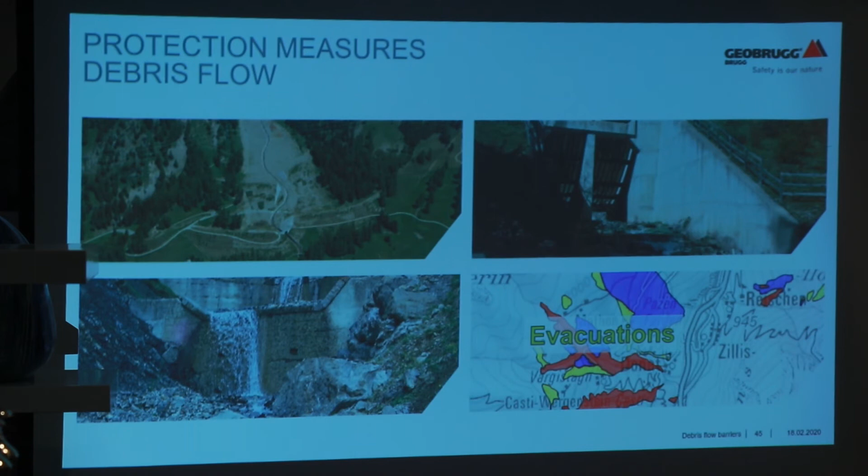Whenever you see the results afterwards, it can be really devastating. So some of the protection measures have been the construction of big earth dams, or concrete structures with steel structures to retain the coarse debris, or sabo or concrete dams.

Also, executing these risk maps, there have been cases in Switzerland where we had to evacuate and resettle people in other areas. Another option is the installation of flexible debris flow barriers, similar to avalanche barriers. Back in the 1950s they discovered those might also retain rocks. We had a rockfall barrier in Japan, and in the early 90s a major debris flow was retained by these rockfall barriers. That's when we started to think we had to develop this further, because it's a totally different dimensioning concept behind a debris flow than behind a rockfall barrier.

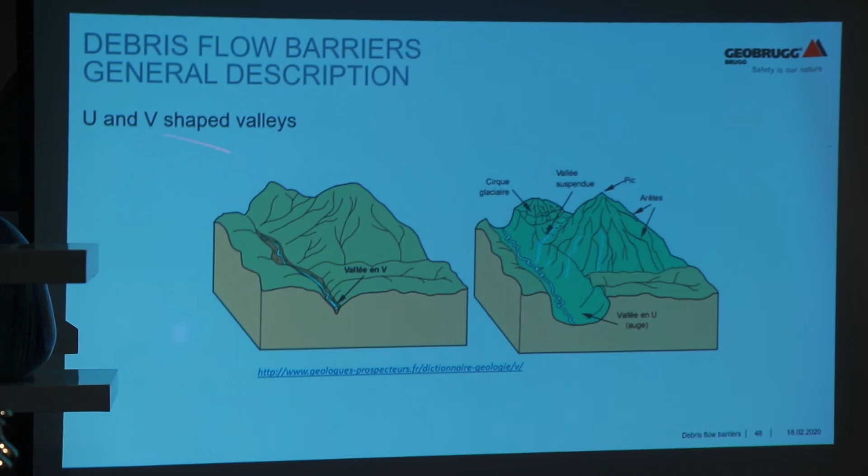We have two types: the V barriers and the U barriers, derived from geographical terms for different kinds of valleys. The V barriers sit in V-shaped valleys without any posts in between, and the U barriers sit in U-shaped valleys, where we add posts in between.

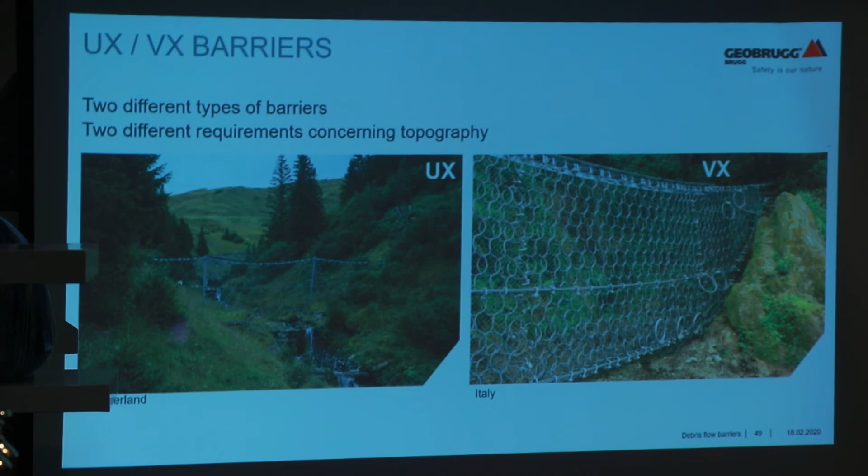Here, what is the height here? The height here is 6 meters, so it's a considerable amount of debris which you can actually retain. But of course this is governed by the geometry and the inclination of the riverbed behind the barrier, upstream of it.

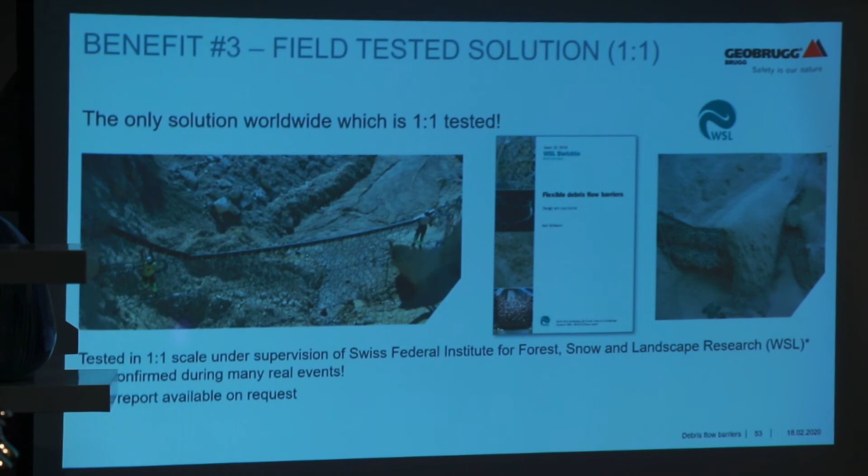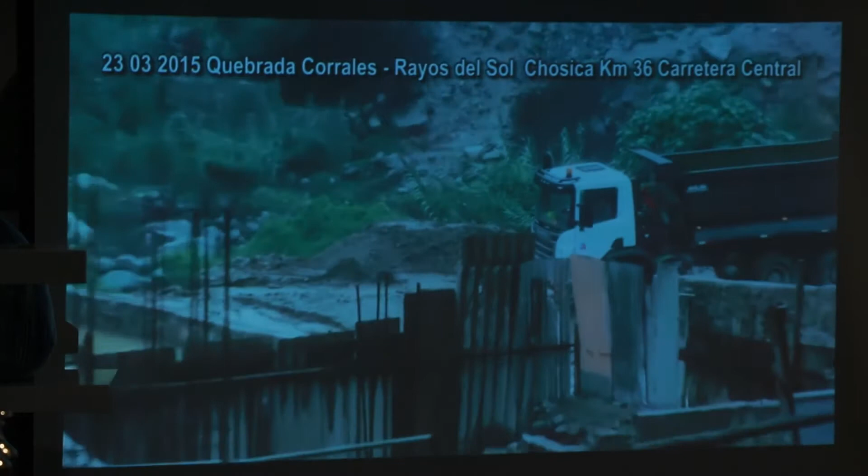Quick case study again, I will take you to Peru, to a place called Chosica, not too far from Lima. We have here a video from 2015 showing the impacts of massive debris flows on this small town. The debris flow actually starts only now. There's a couple of gullies all leading to this city, so we only have this one video. Here it goes.

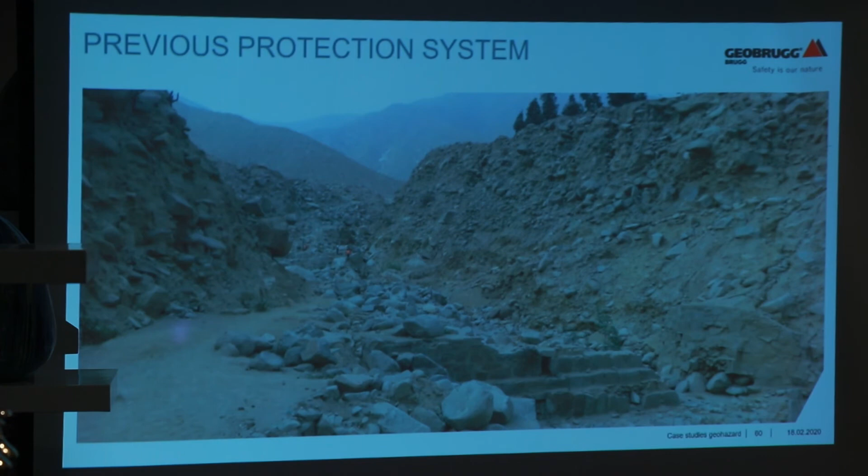So again, there have been retaining structures here, and I think another one was over there. The authorities had to rethink their concept, so instead of installing concrete dams again, we were able to work with our Peruvian partner to install 22 barriers here. You can see Chosica down here, with 4 or 5 gullies going down to the city.

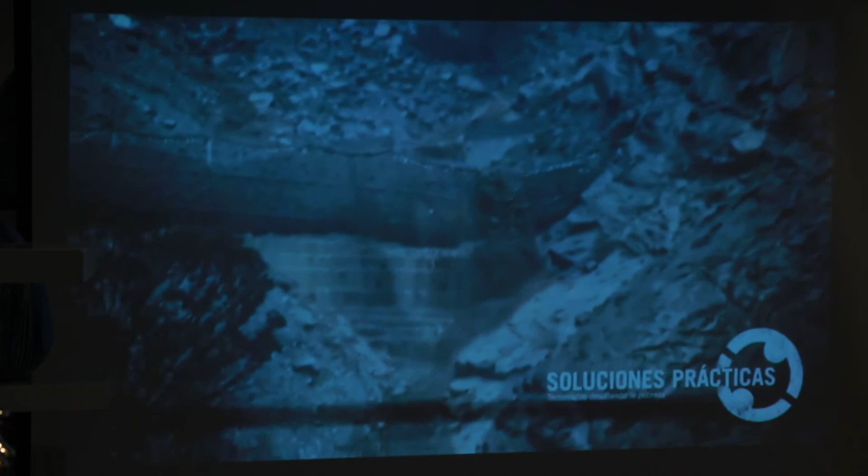We have another video from a recent event where you can see the filled barriers here. They still experienced water in the streets with some debris, but not to the extent seen in the previous video. You can see the barriers here filled up to the top, and still water on the street. Of course, we don't stop the water - the water has to go somewhere. Our main issue is to collect as much debris, as many boulders, as we can. So the previously empty barrier is now all filled up.

A couple more examples. I believe debris flow barriers also have potential here in Nepal, with slightly different applications. For example, here we protected against ongoing erosion in the riverbed that the consultant was worried about, so we installed a series of barriers.

These barriers will not be cleaned, just to protect the riverbed from further erosion. Another example is this check dam, where the foundation was scoured, and the consultant was very worried about failure of the whole dam. So we installed these barriers to collect debris and protect the foundation again.

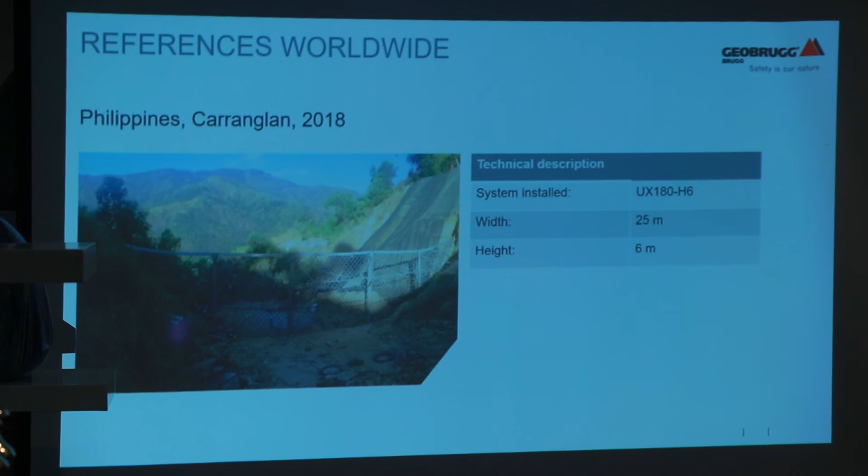And one last example here from the Philippines. And with this last slide, I conclude my presentation. Thank you very much for your attention.

Thank you, sir. We hope that soon our slopes be equipped with appropriate modern technology.